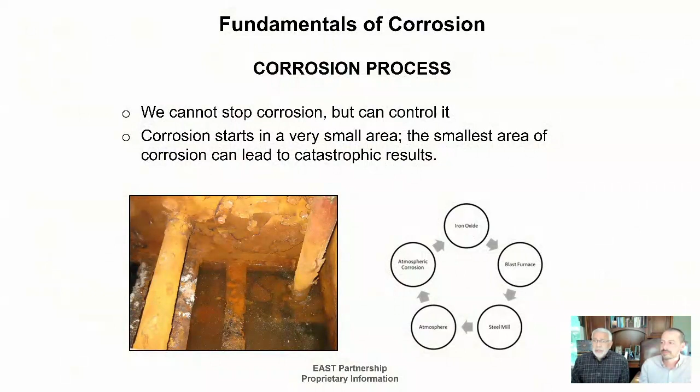Good morning, everyone. As Lucas mentioned, my background is primarily marine application. I have the marine specialty through NACE. However, what we'll speak to today applies to every industry, and the problem of corrosion is all around us. There's really nothing that we're going to discuss today that doesn't apply to many different industries. So I'm just going to cover, as Luke said, high level.

We have to understand where corrosion comes from and then how to mitigate corrosion. You won't stop corrosion. It's the deterioration of a substance as soon as it is created or milled at a mill, and it starts to react with the environment. We'll concentrate on metals, primarily mild steel. However, everything, even wood, concrete, polymers, it doesn't matter. Some sort of corrosion, some level of corrosion happens with all different materials.

So it starts from the oxide, iron oxide for steel. We formulate different alloys to make different types of steel for different applications. And once it's exposed to the atmosphere, you may have seen it. If you took a brand new piece of steel and laid it out in your yard or in your shop, and any type of moisture gets to it, it flash rusts right away. You have some rust on that surface. That is the beginning of the corrosion process.

We tend to get very used to seeing corrosion, right? When we come to our job for the first time, we're walking around the plant, we look around, we see small areas of corrosion, and no one seems to be concerned with that.

And that is the problem, okay? Because these smaller levels, these smaller areas of corrosion will keep accelerating if they go unchecked. So it could be the destructive piece of it. You can end up with a pinhole size, a pin size hole in a tank.

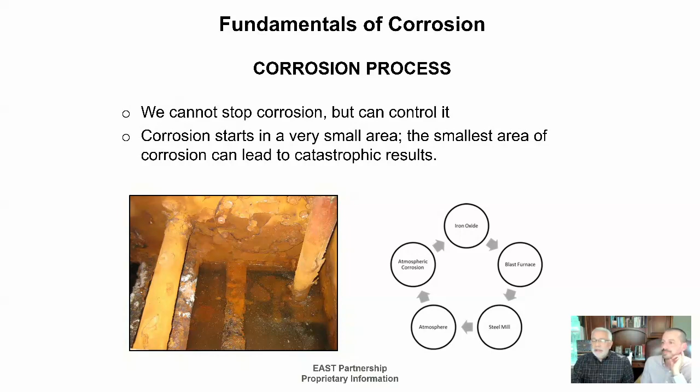So if that happens, is that because we don't have the proper type of lubricant or grease or whatever inside the machine? It could very well be. And it could also be where perhaps this piece of machinery was laid up. We're not using it for a period of time. And so the normal bath it would receive of oil to prevent the corrosion cell from starting, because your oil

acts as a barrier to the material, whatever that material may be, bronzes, brass, steel. It just depends on the piece of equipment. And so if it's not used for a while and we get moisture inside of that enclosure, that small amount of moisture can start a corrosion cell, especially when the protective barrier perhaps settles in the bottom of that sump or tank or whatever it may be.

Fuel tanks are a great example of that on vessels. We don't paint fuel tanks because if the coating system fails, then we end up getting coatings in our strainers and our filters, and the machinery shuts down because you can't get fuel to them. So we don't paint them.

And the normal movement of a ship keeps the fuel in the tank moving and basically coating that tank. So it really depends on the application. And you won't get that in a solid structure on land.

So if you are laying up material, equipment, you need to make sure that you're laying it up properly. We do it with engines all the time, right? There may be a different coolant in an engine that has different properties while an engine's running and what that level of coolant is to what it is if you're laying that engine up for an extended period of time. Any equipment.

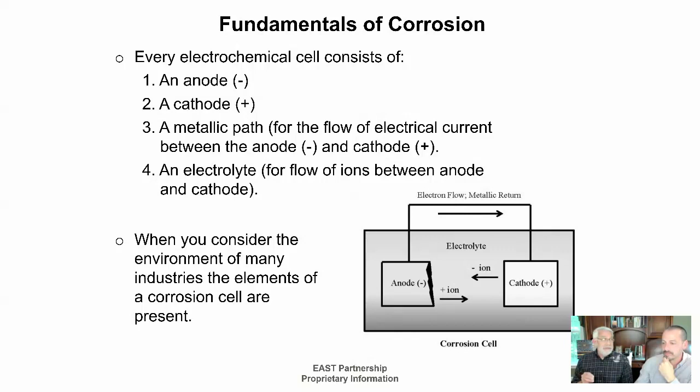So you can remove the electrolyte. You can prevent moisture or minimize that.

Correct, and the ocean's the electrolyte. Right, and I can't remove the ocean. You can't remove the ocean. So removing the electrolyte's a hard thing. Absolutely. And then, of course, you can't remove the hull of your ship either.

And there's many different variants of these materials, right? Carbon steel has several different types, and same thing with aluminum alloys. So the higher on the scale, the more anodic or more negative, and they're going to give up electrons. That just means it's going to corrode faster.

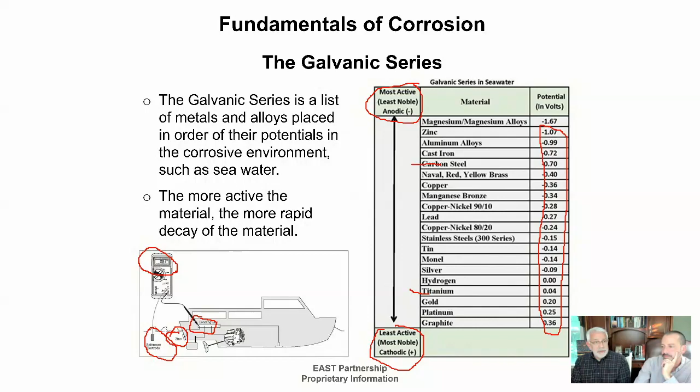Right, so we use zinc in this example with a steel hull and silver chloride, and you could see on the transom of this vessel there are zinc anodes, and zinc is high on the galvanic scale, so it's the sacrificial piece. That's why we use that in coolers. Yeah, in all industries, right? If there's water cooling, they'll put zincs in those coolers.

Gotcha. Okay, so there are several different conditions that accelerate corrosion—oxygen being one of them, temperature another. When temperature goes up, the kinetic energy in that material increases, and that movement of atoms and molecules will increase the rate of corrosion. Using seawater as an example, for each 10-degree increase in temperature, you can double the corrosion rate. That's crazy. It is crazy—so it's any water that has that balance.

Any water, and that's why you'll see if your business is in an area like on the islands, down south, always warm salt air environment, you have a higher rate of corrosion than if you're in an inland area with low humidity, where the corrosion rate is much slower.

Same with plants on the coast of Middle Eastern countries. High salt content, even though it's a drier environment, in close proximity to the ocean, or a bay, has all these corrosive factors present. Even evaporators used to make water in some places cause many issues as well.

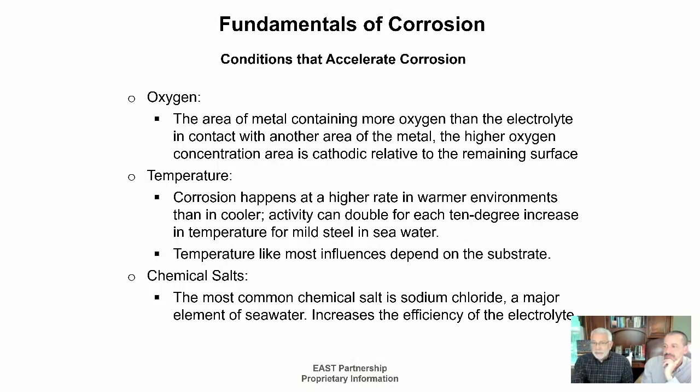So sulfur dioxide is a problem, the gaseous product that a lot of us deal with. In a pure form, in the absence of water, sulfur dioxide is minimal. Once we add water vapor to that, plus oxygen, it forms corrosive sulfuric acid.

And so that brings us into pH. We start getting into the pH of any machinery—you should be monitoring that, checking if there's water coolers and such. On the pH scale, measured 1 to 14, 7 is neutral, 1 to 6 is considered acidic, and 8 to 14 is alkaline. Alkaline doesn't become a real problem until, depending on the material, let's say 8 to 9, because then it starts scaling.

So I'm checking the pH of liquids to see if they're more or less corrosive based on whether they're acidic or alkaline, and I could introduce things like sulfur dioxide because of combustion happening around me. This puts it in the air around my equipment—engines, things like that. So we're constantly coating the equipment with things that accelerate corrosion.

So barrier protection again—I'm hesitating to talk about coatings because coatings are often the barrier protection, and I think for this audience, much of it is lubrication. This lubrication is also a protector and a barrier.

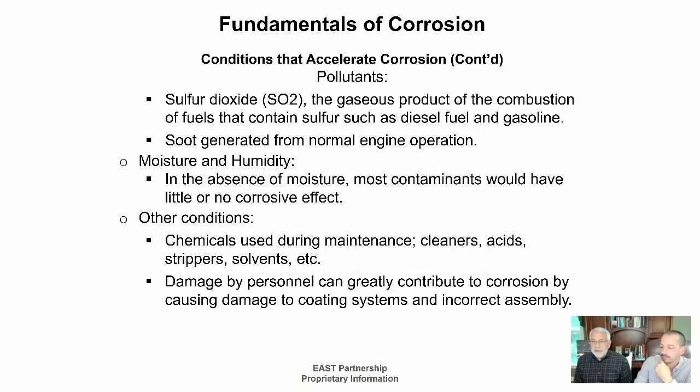So that brings us to: any soot has some sort of corrosive components to it. Depending on the material, the substrate—the base material of the equipment or tank or whatever we're trying to protect—it could corrode at a different rate. Yeah, so moisture and humidity, keep it dry.

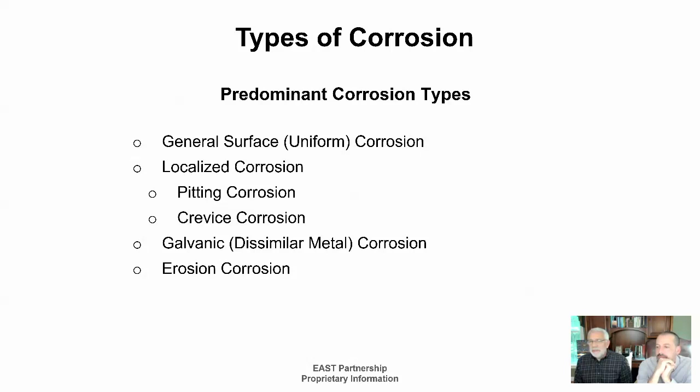So a couple of different types—I picked 3 or 4 types of corrosion that are prominent in most applications, and we'll cover those quickly. So general or uniform corrosion, we see this. It's pretty much unsightly. It just needs to be blasted and coated properly the first time, or whatever barrier protection is going to be put on it to prevent it from happening.

You might see power poles along the highway that are brand new, and you go, oh my God, they're already corroding. That's a low carbon steel—malleable, but yet strong. The difference is it's a low carbon steel, and so it forms an oxidation.

So there's a difference between oxidizing and rusting. Rusting is actually when you start to deteriorate the material, and only mild steel really runs red rust—the metal comes out, comes off in chunks. If we had time, I'd show you a whole bunch of examples.

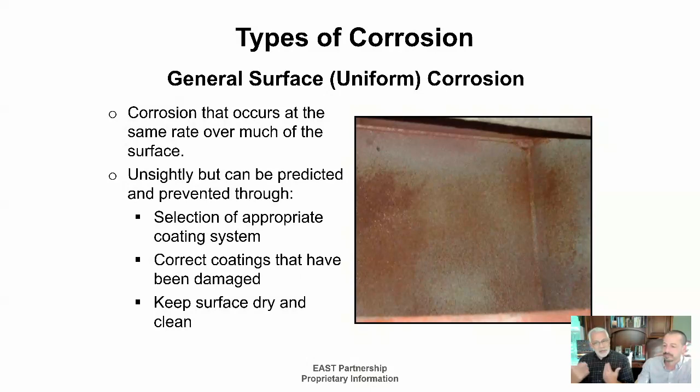But in that low carbon steel, it's weathering steel, like 0.03% low carbon steel, and the outer layer oxidizes and protects the rest of the steel. So it really depends on the application.

Crevice corrosion is very similar to pitting corrosion. Down in the crevice or down in the pit it becomes very anodic. What does that mean? The negative piece of the corrosion cell.

And then the environment, external moisture plus oxygen, makes it cathodic. So you have all this happening in a little pit of metal. That little pit down in there, the deeper and smaller it gets, the cathodic area seems very large as compared to it, and you accelerate the corrosion.

So it gets faster. I always looked at this like cancer on ships. It is cancer, because you can't really see it starting, and by the time you realize you have a problem, you have a problem.

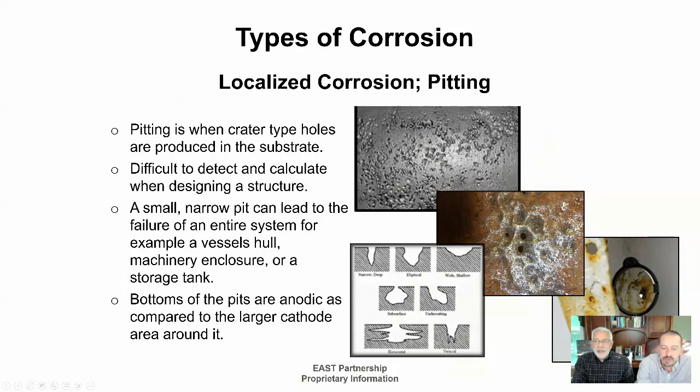So if you look at this picture here, you can see that. This started out as one pit, and then you have a breach, and that's a problem. This is behind the frame. These things, the pitting, usually happen in places hard to inspect.

So if you think about it, if I had to maintain that area, paint it, clean it, lubricate it, if it's hard for you to get into to do that maintenance, that's where it's hiding. The easy stuff is easy, easy to paint, easy to coat, easy to lubricate. It's those areas behind framework, girders, underneath motor mounts, and that sort of thing.

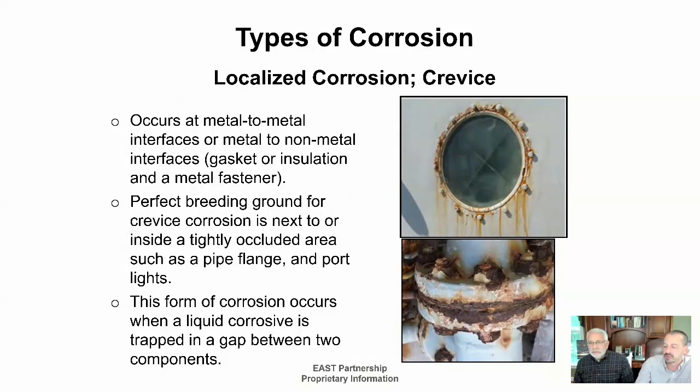And that goes to your last point, which is you're going to have a problem because liquid corrosives get trapped in these spots you can't clean very easily or see, and they just start the process. There's very simple ways to take care of this, but we just don't have time to cover all that. So that was, let me see, where were we? Localized, crevice, and then we talked pitting.

Now galvanic. Galvanic is becoming more and more of an issue because we want things lighter, we want things faster, so we start going to lighter materials. And in our minds we have that aluminum is corrosion resistant, right? I could take a hunk of aluminum, throw it outside on the beach with salt air, come back 10 years, and there's that piece of aluminum.

I could do the same thing with stainless steel, but if I put those two together, we look at the galvanic scale, you can see that aluminum is way up here, in the least noble area, and stainless is down midway through that galvanic series. The further apart these materials are, the more rapid the corrosion rate will be for that anodic piece.

So for people that don't speak corrosion yet, what this means is you have two pieces of metal physically touching each other, and they have different galvanic properties. Some are better or worse at preventing corrosion, and when you put them together, you actually change the relationship of that metal. The one that's inferior, more likely to corrode, takes the brunt of it, and it accelerates the corrosion on that piece because it's bearing all the burden.

So if you start having this failure, everybody runs to stainless steel hardware, no matter what they're putting together, right? And that could be okay, or that can be causing the issues. If it's a real dry environment and they're not too far apart on that galvanic scale, the rate will be super slow, and you may not have a problem for quite some time. If that environment is moist and they are far apart, like stainless and aluminum are, you start to have these issues.

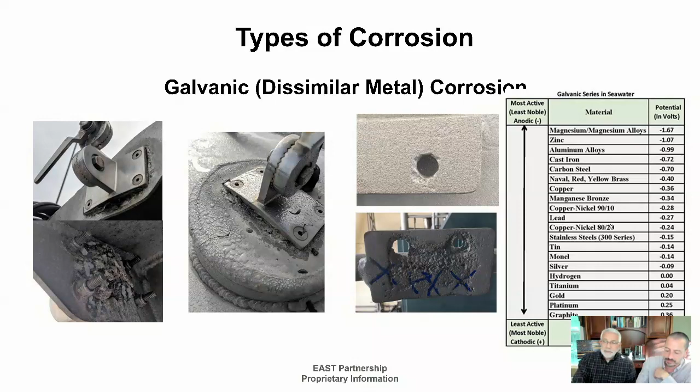And then that's on the lower left picture, that is what's behind that stainless piece, because it was not separated. Gotcha. And we're sitting on 8 minutes total left.

Okay, we have erosion corrosion. Many of you may have this in your piping systems. You start finding breaches in that piping system at weld joints around 90s, 45s. It generally doesn't happen in the straight run of pipe. It normally happens at those areas with more resistance. So depending on what is flowing through that pipe will determine that rate of corrosion within that pipe.

Now there's different pipe types to use for different materials, for fuel, seawater, freshwater, depends on what you have going through that pipe. But combined with cavitation areas and then that erosion area, you actually start to limit over time that area for the fluid flow. So you may see different changes in your pressures and in your velocity, in the volume of liquid that you have, again depending on what's going through that pipe.

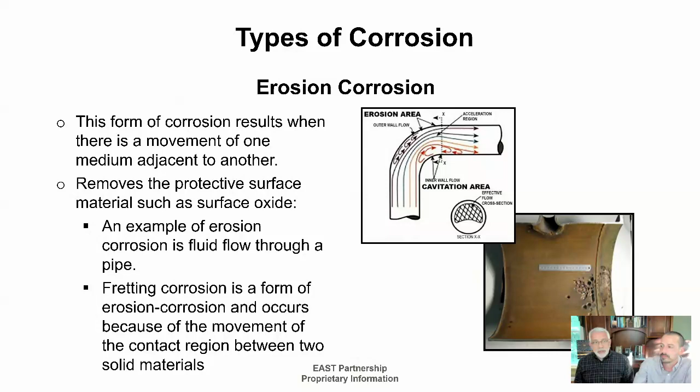If you're taking suction from the sea, as Luke had mentioned, no matter where you are to maybe cool things in your plant, you might look at and you start having a growth in your piping system, microbial. So you can make a little note of that corrosion and research that a little bit. So there's other types of corrosion that's well beyond the scope.

Intergranular corrosion, that's where the grains of the material you start having issues. Exfoliation, corrosion cracking, stress corrosion cracking. It's a big deal. Environmental cracking, corrosion fatigue. So you can have fatigue in a material, and then you can have accelerated fatigue because of corrosion.

The combination of the two is a disaster, because you've weakened the metal. Yeah, you weaken the structure. Bridges fall down because of that. And tunnels failing, collapse, and the big issues with that.

I think the big thing about this is you can just see, even if you don't understand stress corrosion or environmental or corrosion fatigue, whatever, you can see that the last functional word here is cracking, fatigue, embrittlement. Everything's a failure. It's all a separation of material that's going to lead to everything's a failure.

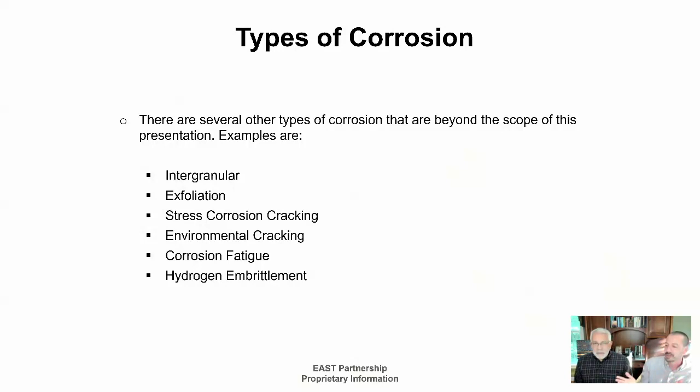And you should know that there's ways of measuring that material thickness. Again, I can go into that, but we don't have time. But I tend to want to do that. So what do we do about this?

So you need to know your equipment. You need to know your environment, because it gets right down to, you could be in a plant and you can have office space within that big warehouse area that's conditioned, and the outside area of that makeshift office space in the middle of this warehouse is not. And so that temperature difference causes condensation on the outside. So if you're starting to see that type of corrosion around those types of areas, know that it's because of the environment we created.

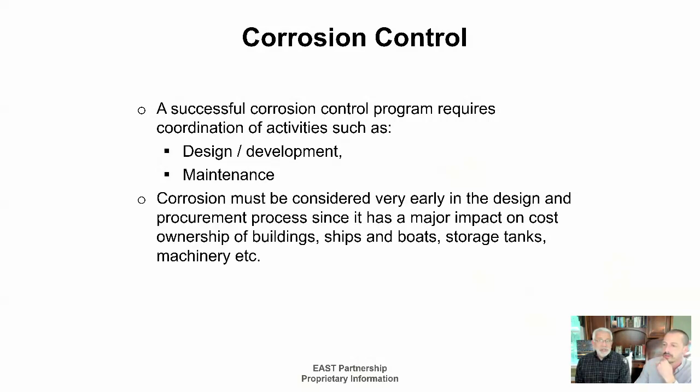So it's not only from nature, but also from what we create. So select the right equipment and then maintain it properly. Use the right lubricants, keep your coating systems intact. And don't use the wrong cleaning materials or introduce the wrong environmental elements. So your safety data sheet and your product data sheet are really important. So anything you're using, you should have those sheets handy for yourself.

And we'll just bump through these real quick, guys, because I know we have like 2 minutes. So design, you have to know the design. Whether you're the designer or not, you have to understand the design so you know where to look. That's the bottom line. So get familiar with your equipment. Remember, I said if it's hard to maintain and get in that space and to lubricate it or coat it, that's the areas you need to know in your design to look at.

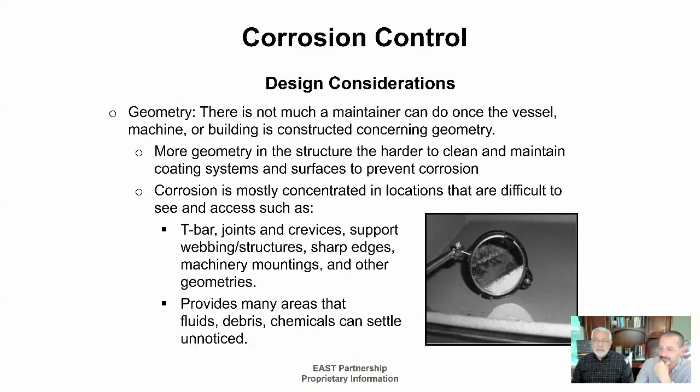So for coated surfaces, you have to be able to clean and prepare that surface, and there's a lot of steps in that process to apply a coating system. I'll just say this: if you're not willing to do the coating system correctly, you might as well not do it. You're going to be just putting money in the trash can. Right, you're just wasting it. You're painting over cancer.

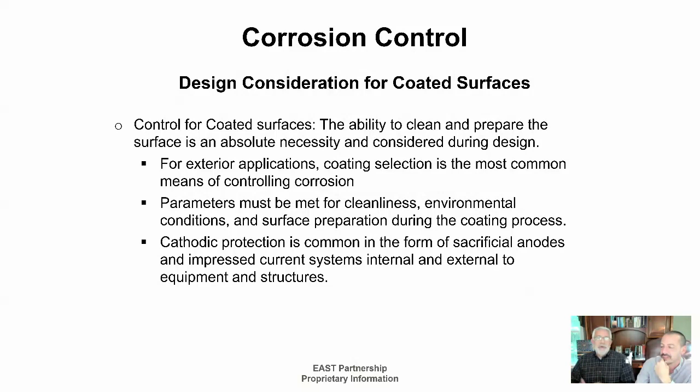You're hiding things, and you may not be doing it on purpose, but you really need to understand the reason for all of these different processes. And by coatings, we generally mean paints, for people that don't work in that world.

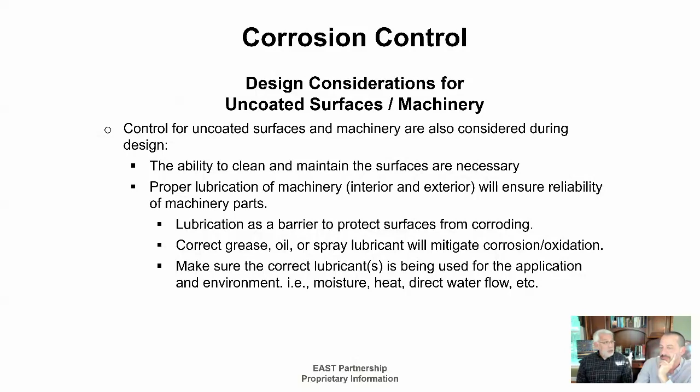What about uncoated surfaces? Uncoated surfaces, again, everything's about clean and dry. If you could keep things clean and dry, you'd be in great shape. Lubrication as a barrier to protect that surface from corroding is perfectly fine. There are spray applications for areas you can't quite reach and get into. There are things that will repel water and give a surface protection, protect that steel.

Correct grease, correct oil, spray lubricants, all of that will mitigate oxidation and corrosion, internal and external to machinery. So we don't just put any oil in something, we don't just put any type of coolant additive in something thinking you're protecting the water system or the oil system. Temperatures, don't forget, we have temperatures to be concerned about.

So running machinery at the right temperature, anti-wear agents, all the lubricants—I'm speaking to the experts on lubricants—so all those different things. And we know when we're not doing the right thing.

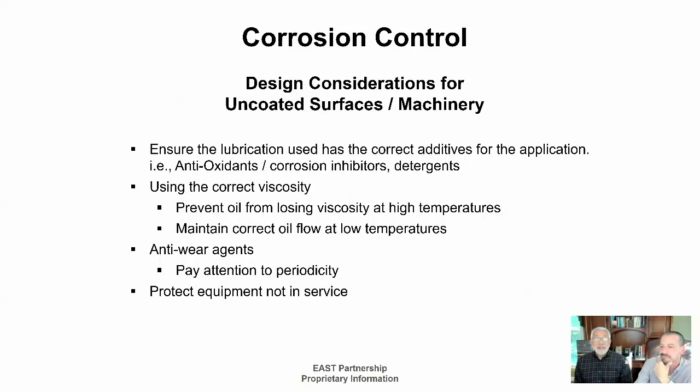Oh yeah, sometimes we don't have this, we'll use this. Well, you take a risk with that. A proper coating system, and that means coatings as paint or coatings as a lubricant, barrier protection. Grease has to be correct. You might think you're using the correct grease, and it can have graphite, right? You can have things that actually cause corrosion of the base metal.